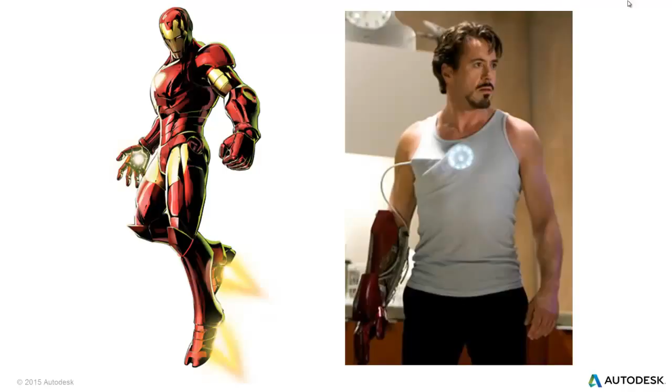So let's take a look at him and see how we can simplify that reactor core that powers him and his suit, I suppose. So for those of you who don't know, his power core or reactor core is what that glowing thing is underneath his shirt.

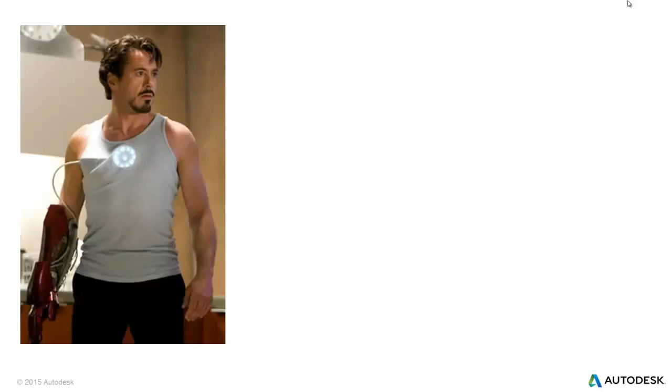Take a closer look at that and you'll see that it's a pretty complex piece of machinery. I kind of cropped this out to make it a little less gross, but there it is shoved into his chest, which somehow powers the rest of his suit and keeps him alive, I believe.

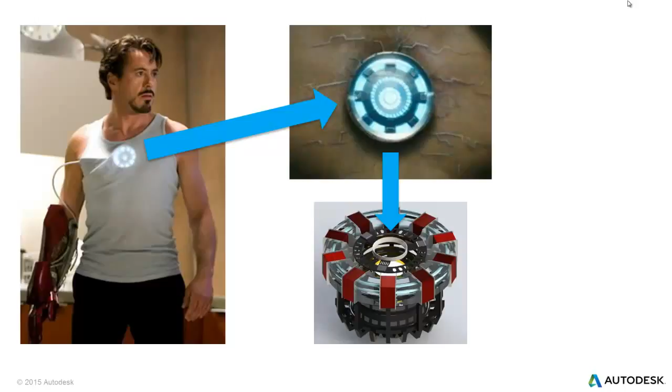To actually do a simulation on it, we need to model it in whatever CAD package you feel like using, maybe something like Fusion 360 or Inventor. From there, we're going to take that model and drop it into SimStudio Tools and simplify it. We're going to get rid of some of those ridges and fillets and holes and just make it a little bit easier for a simulation package to work with. So there you can see the finished product after we simplify it.

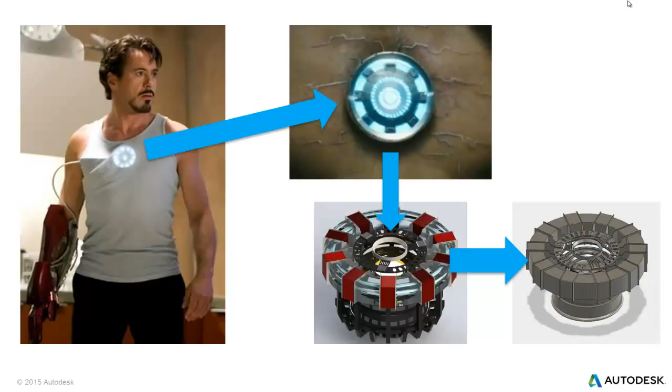With that, let's jump into the software a bit. So here's SimStudio Tools, pretty open interface, and the first thing we're going to do is go ahead and open the file. If we go up to the left corner, we can click on that little open button, and now we can choose what file we want to open.

If we look down at the bottom right, you can see that we have all sorts of different file formats that we support, and we're actually going to work with a SolidWorks model on this one. Someone was nice enough to put it on GrabCAD for us, and open it up.

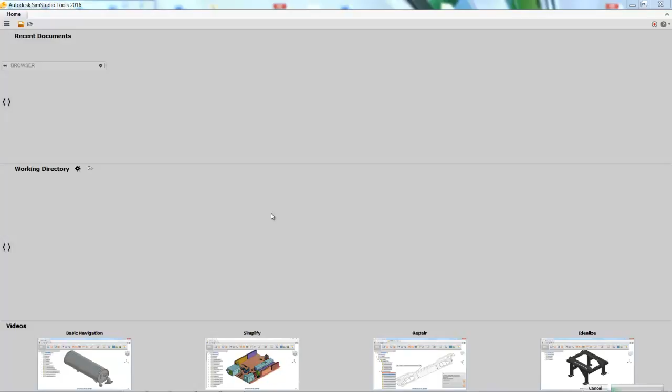And after doing this, you're going to see that SimStudio Tools looks very similar to Fusion 360. So a little plug for our friends over in Fusion Land. Good news, if you know how to use Fusion 360, you're going to be pretty good at using SimStudio Tools as well.

So we're going to start by simplifying some of these details. The biggest concern for me is all of those filleted or rounded edges around the outer surface. So let's go ahead and take care of some of those.

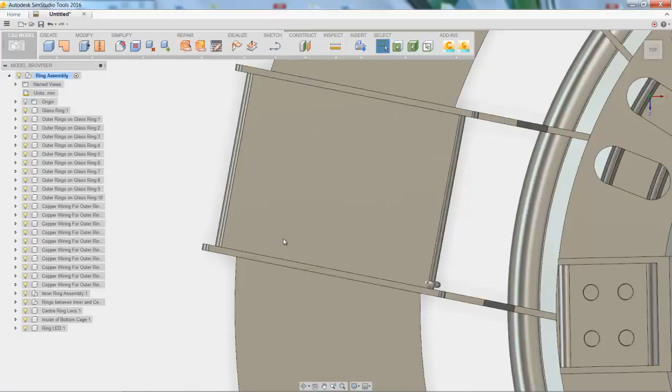To do this, I'm just going to get into a nicer view for us to look at, and we can just select some of these surfaces and choose to delete them. I believe these are all like a pattern feature or something like that. So selecting these and pressing delete gets rid of all of them. Let's see, I missed one, delete that.

If we zoom out a bit, you're going to see that not only did we delete the ones that we selected, but also the other ones that were patterned off of it. So we easily and quickly took care of those details, which would have been a terrible pain to mesh in mechanical, CFD, whatever package you're working with.

Next, you see this ring cut out. I'm a little bit concerned that there might be some geometry errors there, parts interfering or something like that.

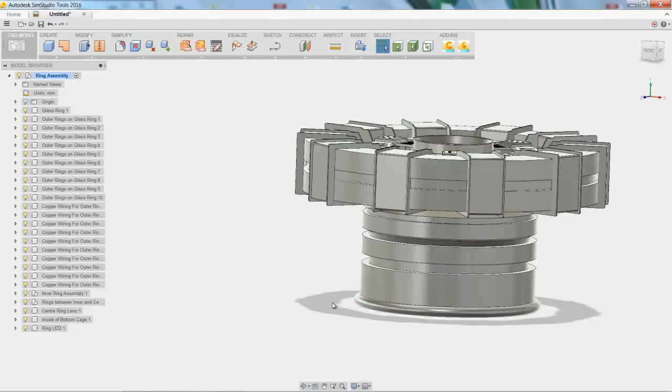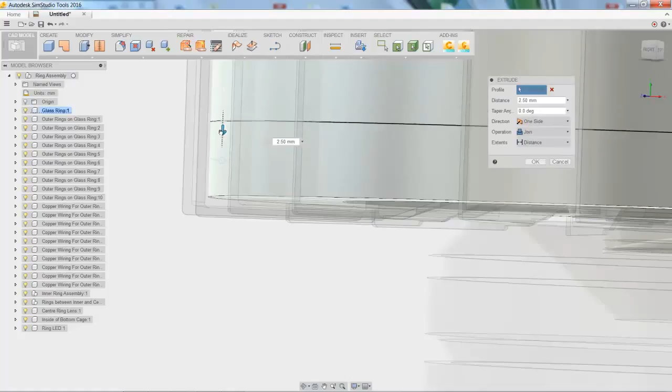That might cause some meshing problems, so I'm going to go ahead and create that surface or extrusion and make it a little bit better. We could use the press pull command or the extrude command, basically doing the same thing. If I choose that top surface, I can just click and drag. Now you see it shows up red, so when that surface is dragged down to be interfering, it's going to automatically choose the cut operation.

We're going to actually choose join, and now you can see that gap is filled in. Since all these parts are now joined together, there isn't going to be a problem when we mesh because they're all going to be made out of that same material.

So next, let's look at a few features that are special to SimStudio Tools. The first one is the repair option, which is really great.

So if you happen to download a model that's a little bit sloppy, or if you aren't real accurate in your CAD design, you can go in here and select your model, choose a tolerance for gapping and things like that. Let's set it to 0.5 millimeters, press this button, and it's going to tell you if it found any problems in your geometry and if there's anything to fix.

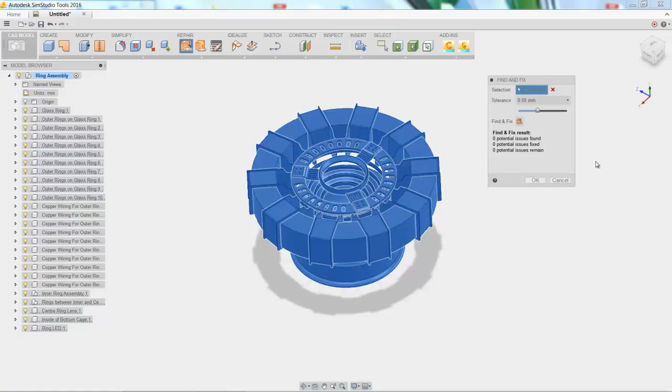Fortunately, after the changes we made, there's no problems with this model, so we're going to be able to continue to move forward. This is actually going to automatically fix some of those errors in your other models, though.

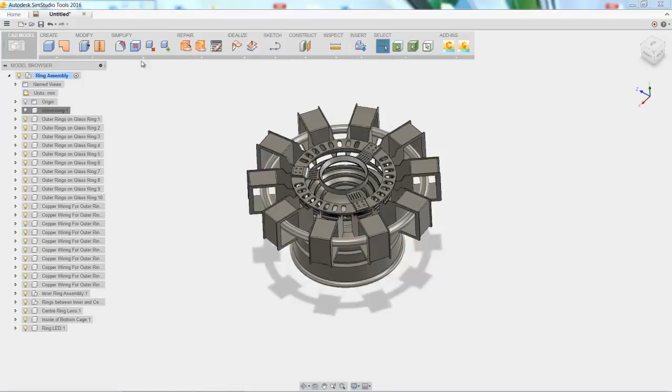The next thing we're going to look at is the Simplify option. You see there are 4 buttons here, and the ones we're going to look at first are Suppress and Unsuppress. So if we choose a part that we don't want included, you can just click the suppress button, and now when we send it over to simulation, it will automatically disappear, so it won't be part of the analysis. We actually want to keep it there, so we're going to choose to unsuppress it.

Next, let's take a look at remove features. So let's select that very complicated ring in the middle, and you see that all of the features are selected over there to the right. It's looking for fillets, holes, chamfers, pretty much everything.

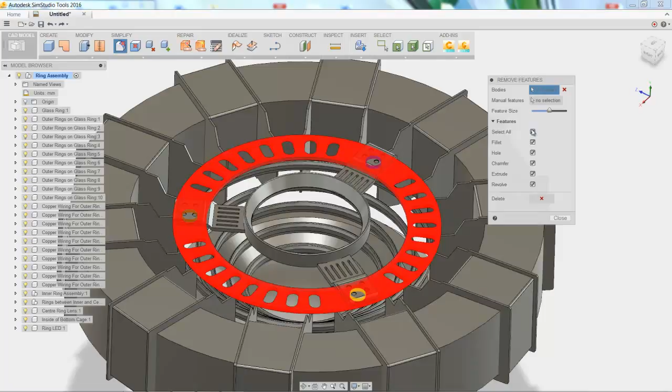Let's go ahead and just choose hole, and when we do that, you see that 3 holes show up. If we extend that out, we can change the size of holes it's looking for, so it finds that 4th one that's added in there. But we want to keep that one. So let's choose the delete button, and when you do that, those 3 holes are automatically removed.

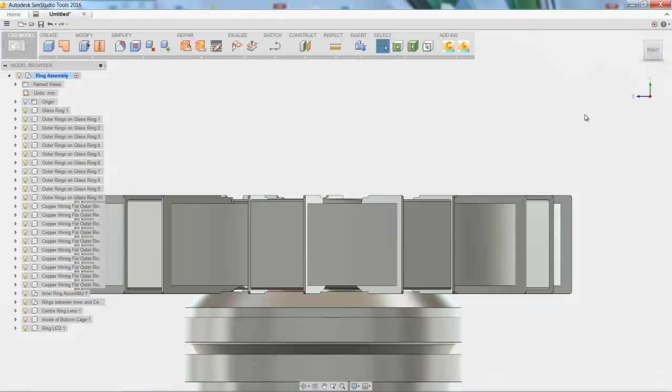Now be careful there, because all of those other round looking holes might not actually use the hole command. They could just be extrusions, so you would have to remove those in a different way, maybe by using that press pull command or the extrude command again, or maybe making a sketch over top of them. So just simple CAD maneuvers that most of you are probably very familiar with.

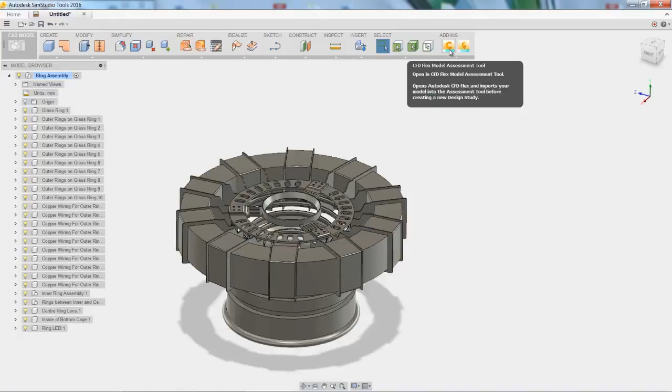So with that, all we have to do is send it over to whatever simulation package we want. You see that we have tie-ins to CFD and mechanical right here. So I'm going to send this over to CFD, maybe to do heat transfer analysis on it or something like that.

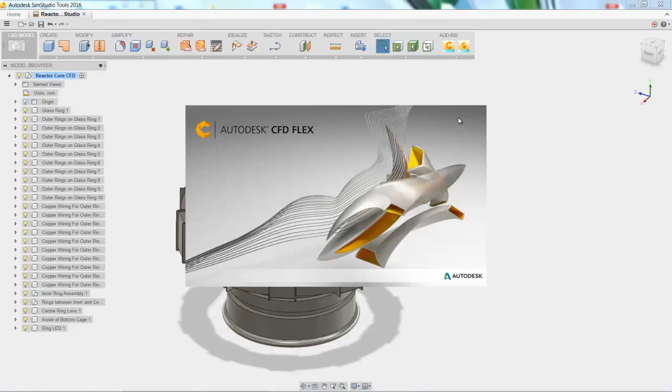So let's give it a name, Reactor Core CFD. Click Save, and it's automatically going to launch Autodesk CFD Flex for me, which is the version I have installed on my machine. Then it goes through and shows over to the left that we're all set with importing successfully, so no geometry problems for our mesh.

This just shows that our mesh is going to be successful, and moving forward we're going to be able to run our analysis without complications.